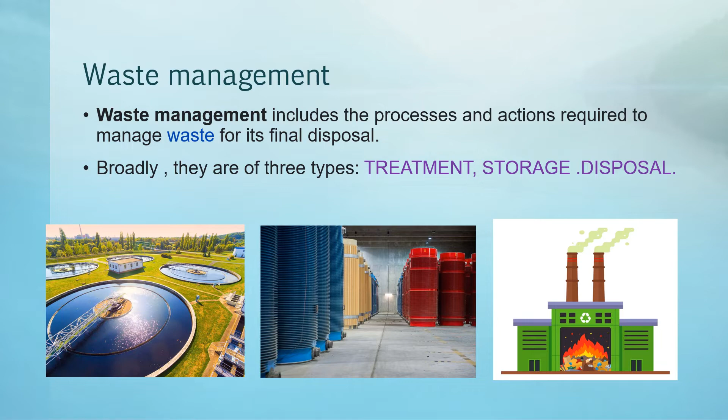In storage, for example, we have nuclear waste storage. We can't treat it further, right? So it gets stored. In the case of disposal, we have landfills and incineration itself.

Incineration is a method of waste treatment involving the burning of waste. Incineration and other high temperature waste management processes come under the category of thermal treatment. Particularly, it involves converting waste material into ash, flue gas or waste gas, and heat. The ash mostly consists of inorganic components of waste, and it will be in solid lumps or particulates.

These ashes get collected by the flue gases, so the flue gases carry this ash. Before being released, the flue gas has to be cleaned of particulate and gaseous contaminants. Sometimes the heat generated is used in useful ways, like producing electricity.

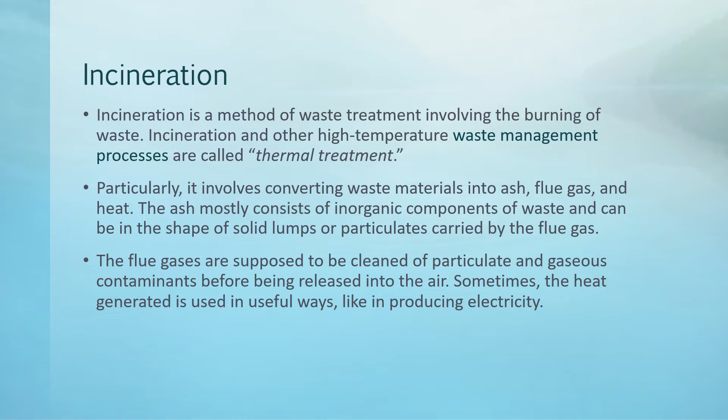Incineration plants can reduce the mass of waste by 95 to 96%. The decrease in the waste is determined by the recovery level and decomposition of substances. Even though incineration does not substitute the need for landfill, it has been able to reduce the quantity of waste in landfills. Landfills take more time compared to incineration because incineration is an instant process, right?

Incineration has numerous benefits, especially in terms of destroying contaminated medical waste and other life-risking garbage. Also, incineration largely utilizes waste-to-energy technology. In Japan, for example, thermal treatment is very popular since they have a shortage of land reserves. Plus, the energy produced by incineration plants is in high demand in nations like Sweden, Denmark, etc.

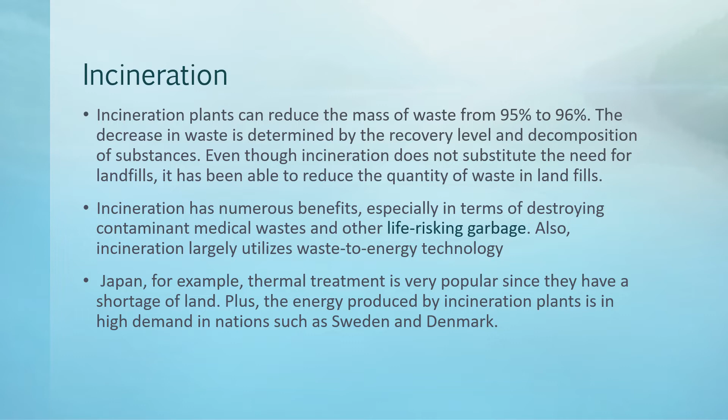Advantages of the incineration process. First, decreased quantity of waste. Incineration can decrease the quantity of waste by 95% and reduce the solid quantity of the waste by 80 to 85% depending on the components of the waste. Therefore, incineration reduces the dependency on landfill.

Efficient waste management. Incineration plays a vital role in making waste management easier and more efficient. Incineration can burn up to 90% of the total waste generated and sometimes even more. However, landfills only allow organic decomposition without making much difference. But when it comes to non-organic waste, it keeps accumulating.

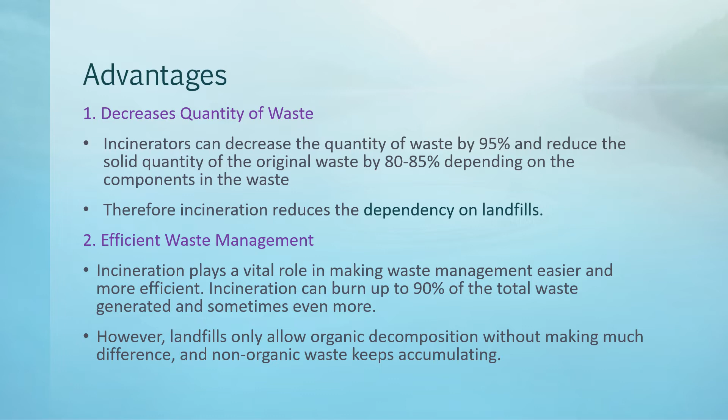Production of heat and power. Incineration plants generate energy from waste that can be used to generate electricity or heat. On average, a single facility can burn up to 300 million tons of garbage every year, converting it into power and at the same time reducing the load on coal-fired power plants. For example, Sweden generates 8% of its heating needs from waste incinerators, reducing pollution. Researchers have shown that solid waste incinerators are less likely to pollute the environment than landfills.

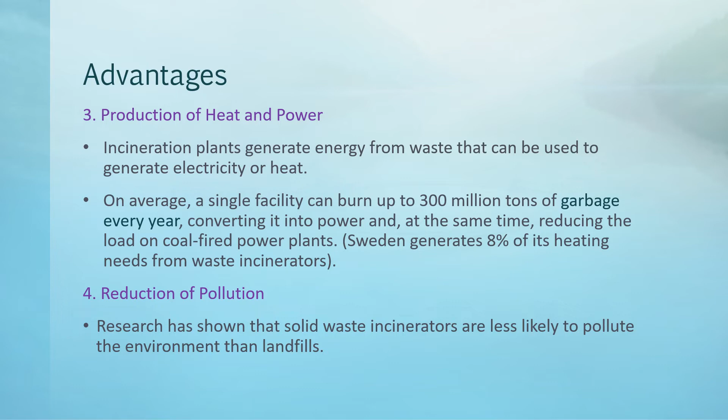Saves on transportation of waste. Consider that incinerator plants are near cities and towns, so we don't need to spend much on transportation, right? This is an advantage since it means waste does not have to be driven long distances for dumping. So it significantly reduces the cost of transportation.

Eliminates harmful germs and chemicals. Incineration plants function at a very high temperature that can destroy harmful germs and chemicals. Thus, it is a very effective method when it comes to eliminating clinical waste.

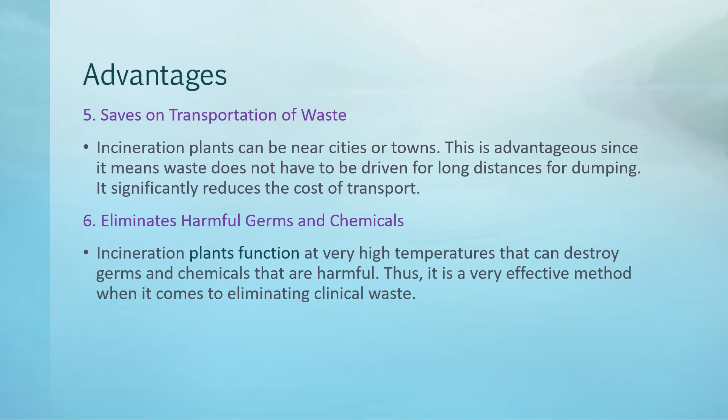Incineration has its own disadvantages. First, it is expensive. Installation of an incineration plant is an expensive process. Particularly, the cost of constructing the infrastructure and the cost of operating incineration plants are very high. Also, it needs skilled technicians to operate the plant. Damaging public health.

The communities where incinerator plants are built face long-term effects in the form of health hazards like cancer, birth defects, reproductive dysfunctions, neurological problems, and other health effects that are known to occur at very low exposure to many of the metals and pollutants released by these incinerator plants. Respiratory problems, increased cancer rates, reproductive abnormalities, and other health effects are common in areas where incinerator plants are built.

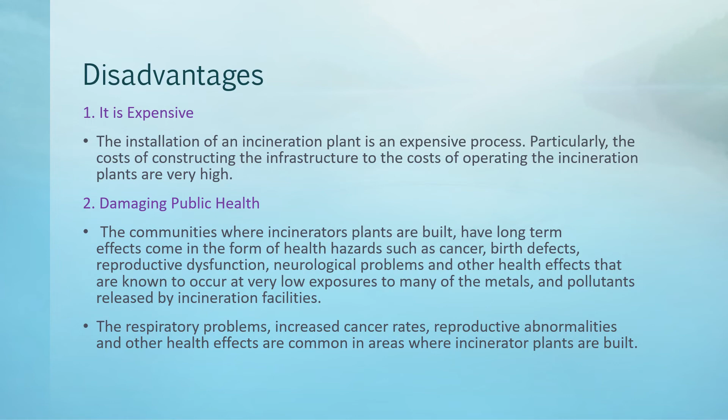Impact on the 4 Rs, that is reuse, reduce, repurpose, and recycle. Incineration does not encourage recycling and waste reduction. This is not a calculated strategy for any society. The focus should be on reducing waste and recycling most of it. Verily, burning most of the waste without recycling some of it will only cause environmental damage because it may encourage more waste production.

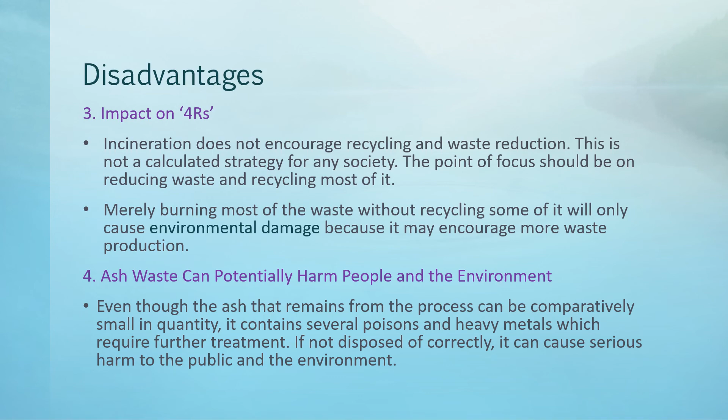Ash waste can potentially harm people and the environment. Even though the ash that remains from the process is comparatively small in quantity, it contains several poisons and heavy metals which require further treatment. If not disposed of correctly, it can cause serious harm to the public and the environment.

Waste incineration in developing countries is neither as practical nor as economical as in developed countries. A high proportion of waste in developing countries like India is composed of organic kitchen scraps, with a higher moisture content of 40 to 70%, compared to the waste produced in industrialized countries, which contains only 20 to 40% moisture. So it is difficult to burn these high moisture content wastes.

But in locations where space is scarce and in high demand, municipal waste incineration plants are undoubtedly a superior alternative to landfills, and that may keep them relevant for a long period of time.